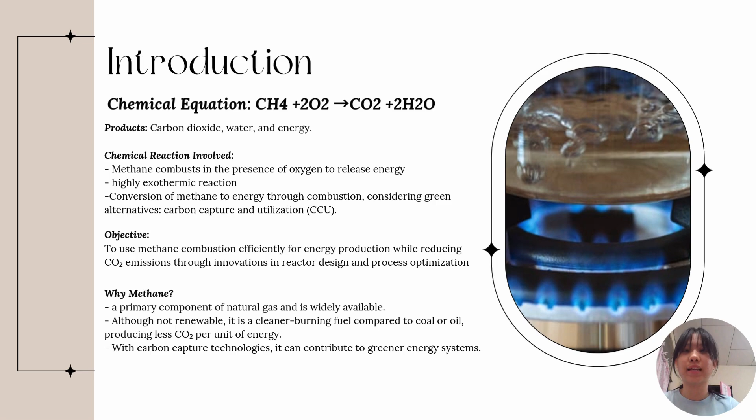Okay, now I'm explaining what is CCU, carbon capture and utilization. CCU is a range of applications through which CO2 is captured and used either directly or indirectly in various products. And CO2 is today primarily used in the fertilizer industry or for enhanced oil recovery.

Okay, so now we come to the reason of choosing a plug flow reactor. So the first one, a plug flow reactor allows for continuous operation, which is also critical for large scale energy production. It also offers high conversion rates, easily scaled to industrial applications, making it ideal for power plants or chemical processing units. And also the PFR design allows efficient heat transfer and prevents overheating.

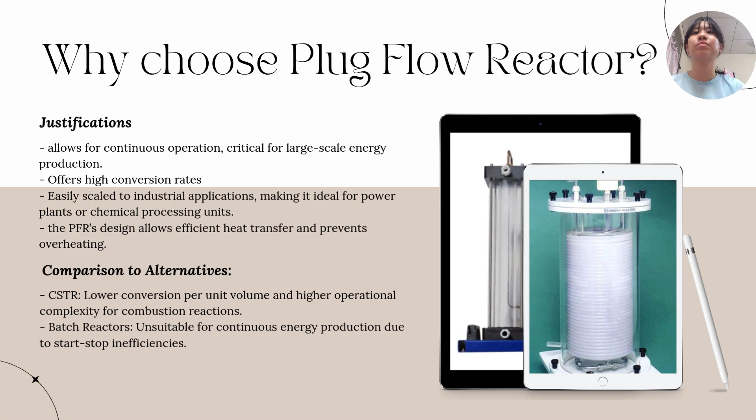So why are we not using CSTR or batch reactors? Because CSTR has lower conversion per unit volume and also higher operational complexity for combustion reactions. Batch reactors are unsuitable for continuous energy production due to start-stop inefficiencies. Next, move on to our chemical plant design.

This is a list of operating units. First, we have a mixer to mix the methane gas and air. Then, there will be a furnace to preheat the gas mixture. The temperature needed for combustion of methane is really high. Hence, to improve the efficiency of the combustion, we preheat the gas mixture.

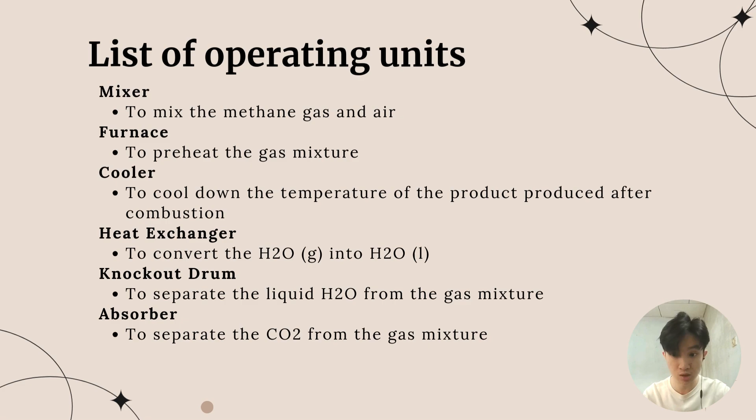After the combustion of methane, we use a cooler to cool down the temperature of the product produced. To separate the H2O gas from the gas mixture, we use a heat exchanger to convert the H2O gas into H2O liquid. Then a knockout drum is used to separate the H2O liquid from the gas mixture. Lastly, the absorber is used to separate the CO2 from the gas mixture.

So this is our process flow diagram. The methane gas and air flow into the mixer at 298 Kelvin and 1 atm. In the furnace, the gas mixture is preheated to 623 Kelvin before entering the reactor. The temperature needed for combustion of methane gas is 2222 Kelvin.

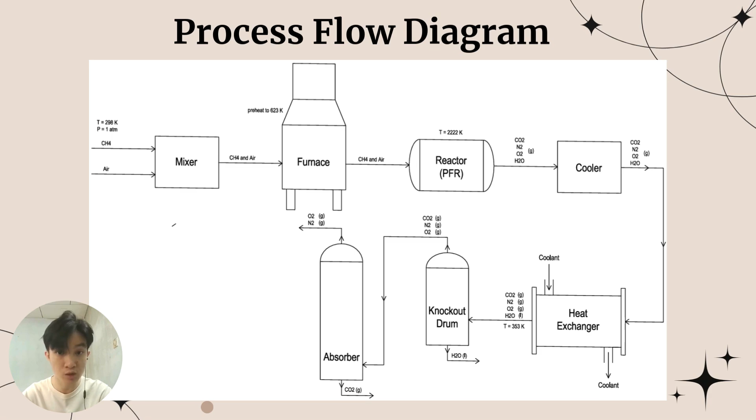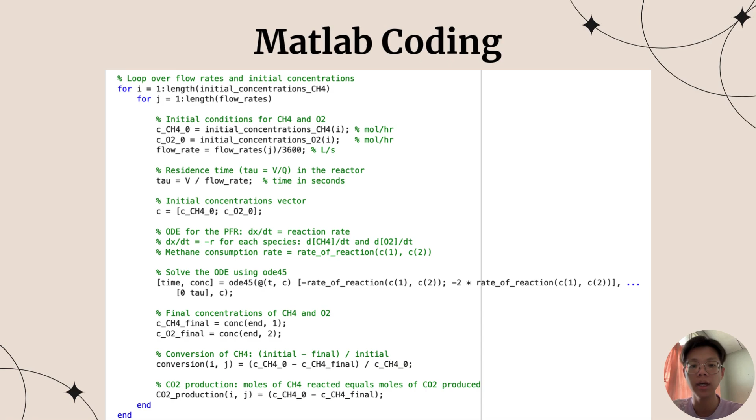So the second slide is about the MATLAB coding that we are using to calculate the flow rates and the initial concentration with the respective coding. In order to calculate the initial concentration and the flow rate, we also insert the ordinary differential equation for the PFR in order to solve and get the reaction rate. After that, we can get the final concentration of methane gas and oxygen gas, and also the conversion of the methane gas as requested by the question.

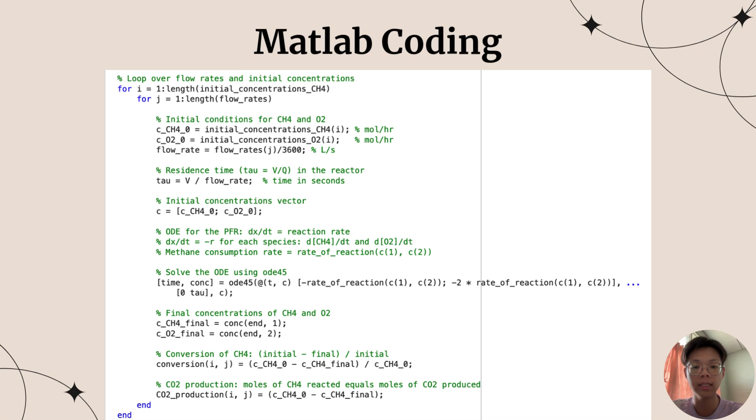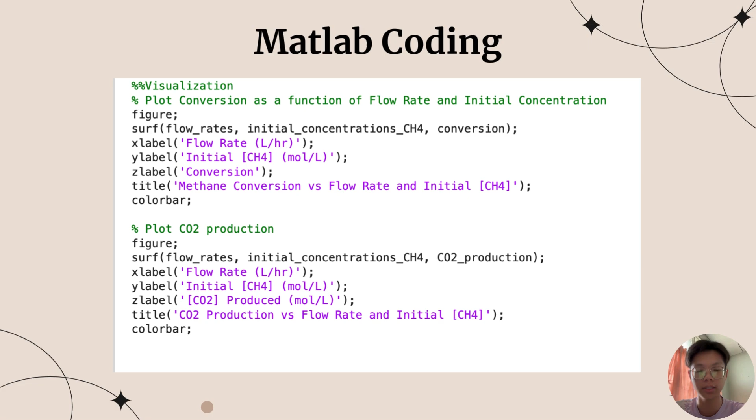And last but not least is the carbon dioxide production over the methane gas reacted in the reactor. So this is the last slide where we are using the MATLAB coding. In this slide we use the coding to plot two graphs. The first is the conversion of methane gas as a function of flow rate and initial concentration. The second is the plot of carbon dioxide production over the methane gas reacted.

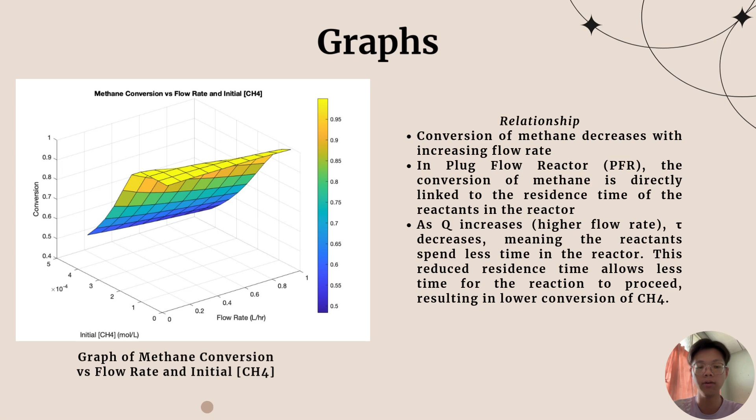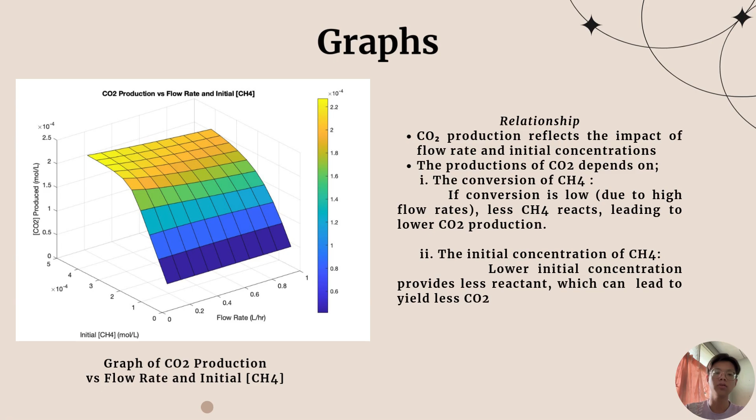The second graph is the graph of carbon dioxide production versus the flow rate and the initial concentration of the methane gas. So as we can see in the graph, the carbon dioxide production reflects the impact of flow rate and the initial concentrations. The production of carbon dioxide depends on the conversion of methane gas. This is the first, and I can justify that if the conversion of the methane gas is low due to the high flow rates, less methane gas will react, and this will lead to lower carbon dioxide production. The second factor affecting the production of carbon dioxide gas is the initial concentration of the methane gas, because a lower initial concentration of methane gas provides less reactant, which can lead to less yield of carbon dioxide gas.